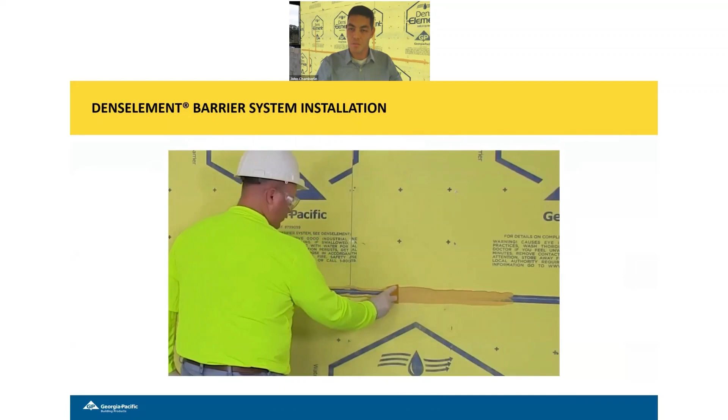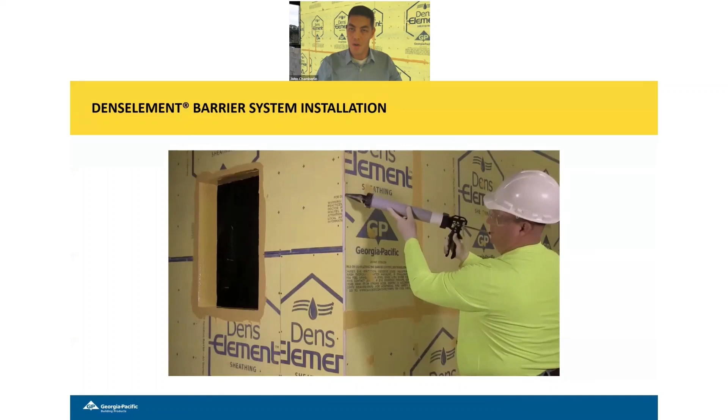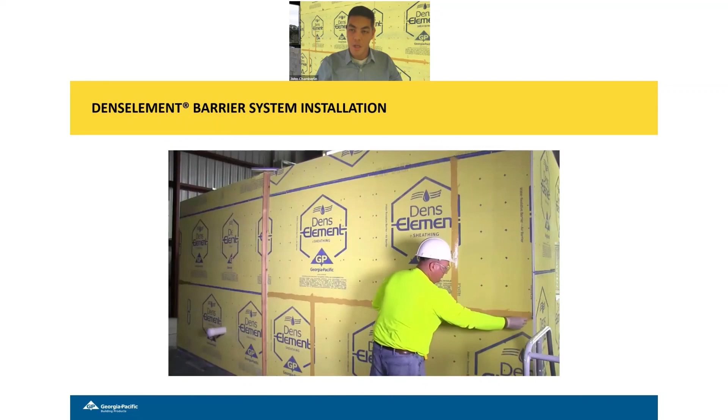Now, I mentioned already, the board itself is your water resistive barrier and your air barrier. So you create the continuity of your building envelope, of your water barrier and your air barrier, via this DensDefy liquid flashing. And we've really tried to prioritize ease of application. So you see it spreads very similarly to peanut butter, and really tried to focus on how do we make all of this continued benefits of schedule compression and reduction in quality control kind of inherent in the whole system.

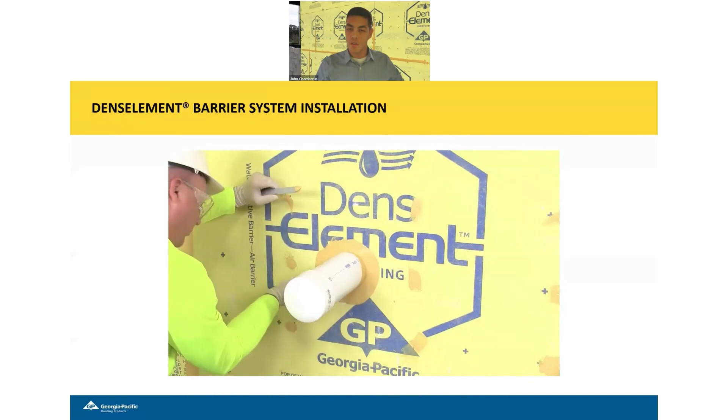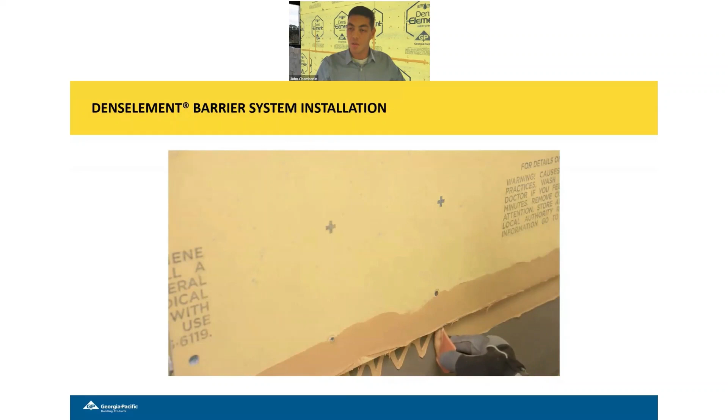So you see that DensDefy liquid flashing goes on as a liquid product. It can be spread very easily, and it conforms really nicely to some of these complex geometries. It is an STPE-based product, which means it can be installed in lower temperatures. It can be installed on damp surfaces. It cures and skins very, very quickly. And it becomes the second component and allows for completion of your water resistive barrier and air barrier system with Dens Element barrier system.

Now, as I mentioned, that has become a very popular trend in ways to construct. And obviously, you're seeing more and more projects using Dens Element throughout the country. In fact, we've got over 800 projects that have been completed, very close to 900 in construction right now. And this is ranging across all sorts of vertical segments. Commercial construction obviously can be healthcare or hospitality or education or government. And so we're seeing all of those really taking to the benefits of the Dens Element barrier system.

Now, the challenge with these systems is, how do you maintain that continuity? How do you know that you're going to have the same level of performance in these areas where your integral WRB sheathing stops? Or if you even have a strategy figured out for that, how do you feel confident in those connections? How do you tie them together? So continuity, first of all, it's critical. It has to exist. Otherwise, you're not going to have proper water resistance, proper air controls.

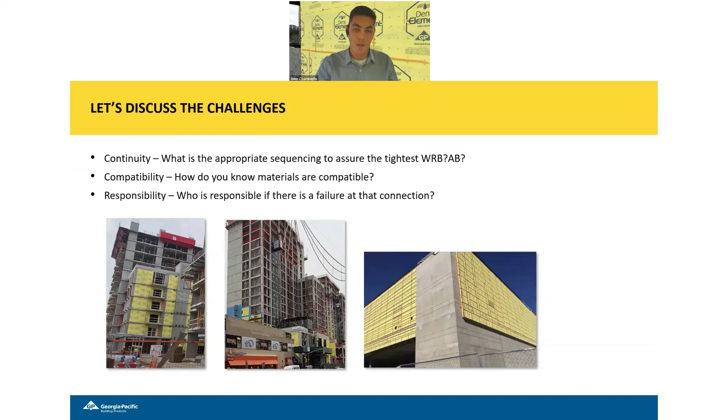And so we have this problem, this issue, right? And we want to maintain continuity. That's really the key to good performance. And then we have this challenge of maintaining continuity across different systems, potentially with different manufacturers. And what you see today is that in some cases, people go for it. They use a system that they're familiar with.

Perhaps the scope of work for cementitious substrates belongs to a waterproofer, and so they're going to use a system they're confident with. Maybe it's the drywall installer who has responsibility for installation of the DensElement barrier system. And so they kind of work in their own silos instead of coordinating with each other. And maybe that can work, but there's a lot of uncertainty. There's a responsibility for a decision that falls to someone in that project team.

And the bad day is when things don't work out, when there is not good compatibility. And sometimes we have obvious signs of that. Maybe we see bubbles or fish mouths, signs that there's not good adhesion. Maybe we see poor adhesion that actually will pull away prior to something else getting covered up. So if we're lucky, we can catch this early. But a really bad day is over time, as the building continues to move, there's a degradation driven by a lack of compatibility. And so that's what you want to avoid.

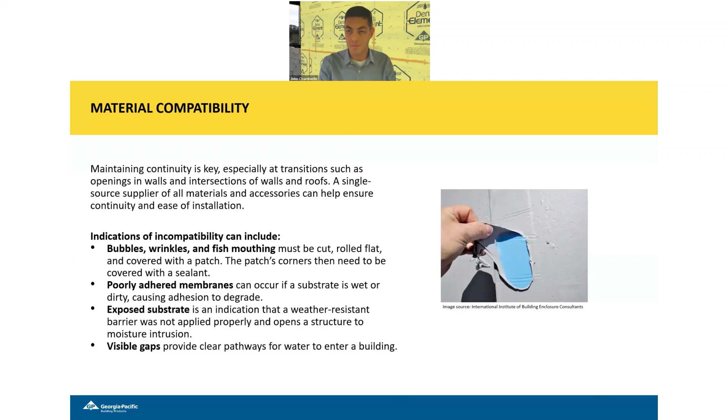That's what Georgia-Pacific has recognized as something that our customers need and want and are asking for our guidance on. And so I'm happy to announce that earlier this year, we launched a new system, the DensDefy liquid barrier system. We took a look at what is so popular about the DensElement barrier system, being the efficiency of installation, the ability to condense construction schedules, just the sheer ease of quality control. And we said, how can we carry that forward on substrates where you're not going to have a gypsum sheathing?

So DensDefy liquid barrier has all of those same attributes that you see in our liquid flashing. It's very easy to install. It can be installed in lower temperatures. It can be installed on damp substrates. It cures and skins very quickly. And most importantly, we know very well how it's going to interact with components of the DensElement barrier system, with the other DensDefy products. And so Georgia-Pacific is now able to offer a limited warranty for systems branching across not only DensElement, but also substrates that are protected with DensDefy liquid barrier.

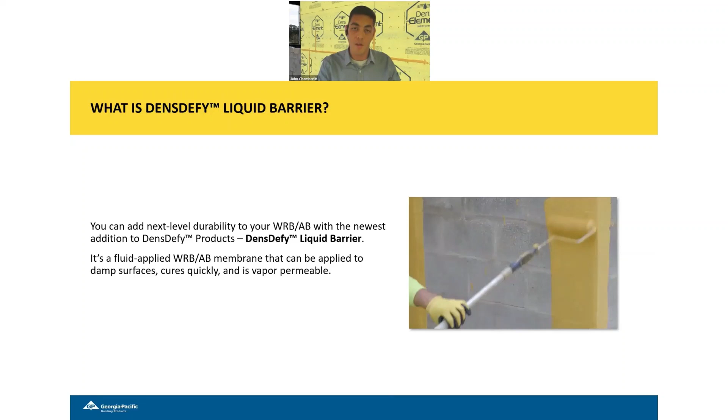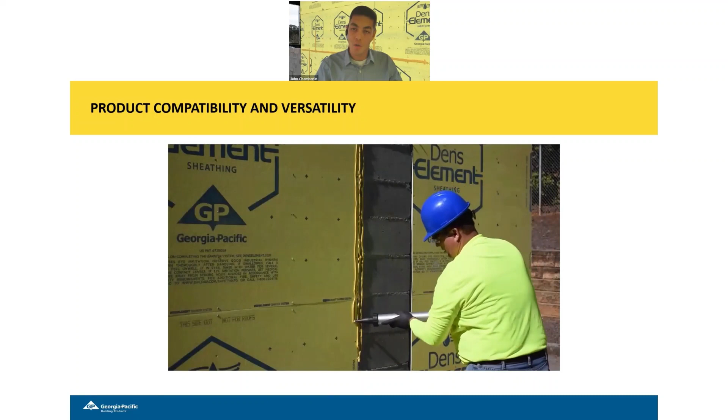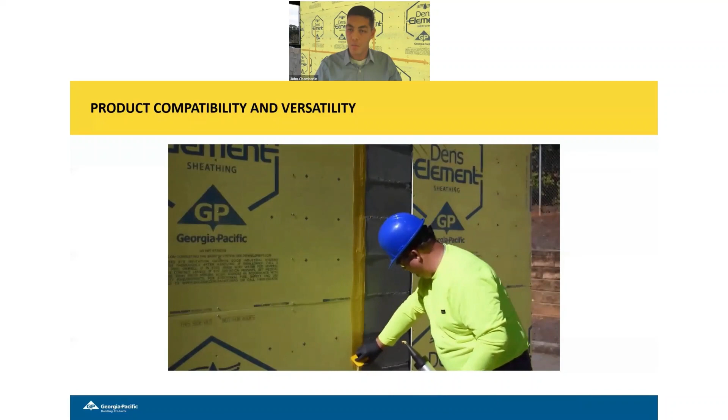And so again, here's the demo part of our demo cast. So in this example, you see that DensElement is running up into something load bearing, in this case CMU, and you see the same DensDefy liquid flashing that's used to complete a DensElement barrier system can now be used for these joints and these gaps between substrates. The product itself has high elongation, so it bridges very well. And once that has cured up, you've got good continuity of an air barrier from the DensElement over to the CMU.

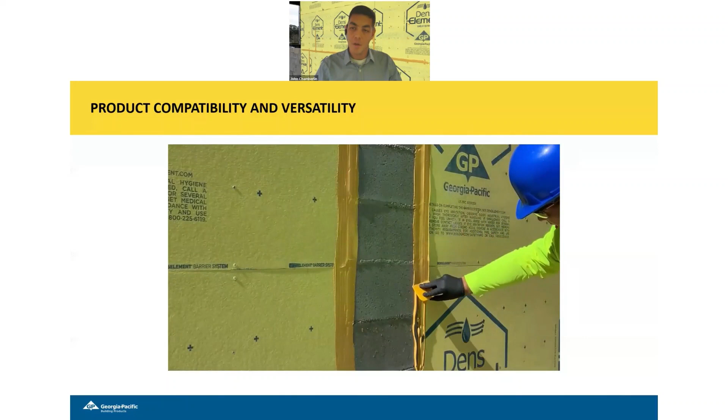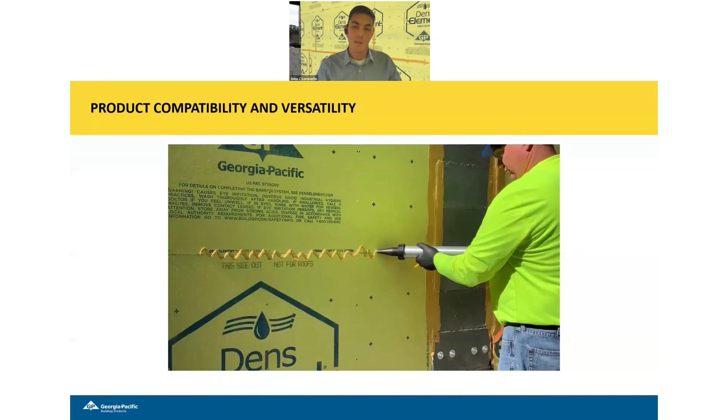You'll see that now, once you've done your visual inspection and made sure that you don't have any voids and pinholes, you can move on to address any areas of discontinuity for the DensElement barrier system itself. So again, spreading over our joints and seams, making sure that any fastener holes are covered up. Those are opportunities for water or air to get in, and we do require that those get covered. And just coming back and tying it all together so that your air barrier and your water resistive barrier are good and continuous. These products, simple to install, easy quality control, making sure that you have a proper mil thickness.

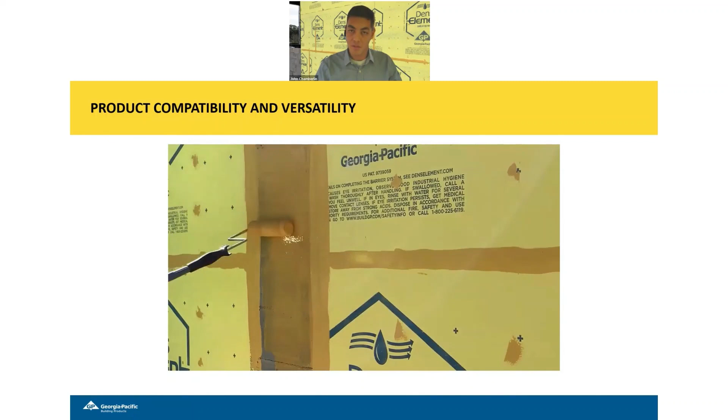For the liquid flashing, it's approximately 16 mils, so not a lot of material. For the DensDefy liquid barrier, which you now see being installed, we recommend a minimum of 14 to 18 wet mils, but you're going to find on porous substrates such as CMU that you really go for a void and pinhole free surface. You may not be able to hit exactly 14 to 18 mils, but because this product installs very simply, much like rolling paint, it's very easy to get that monolithic surface with only a couple of passes. And so there we have DensDefy liquid barrier.

I realize that was fast, and there will be time for some questions. But really, here's the value proposition in a nutshell. So we are going to continue construction. There is going to continue to be an expectation for high performance throughout the lifetime of the building. And at the same time, we're going to be challenged by compression of our construction schedules, by a lack of available labor. And again, there's always a look to opportunities for value engineering.

And so Georgia-Pacific has heard these challenges, and we're rising up to them, and we're doing that through innovation of products and services. So today we have our DensElement barrier system. We're now able to extend our protection against water intrusion, against unwanted air movement with our DensDefy liquid barrier system across all exterior walls. And you don't just get the products with that. So we are able to provide a warranty that works against water and air across all of these walls, as I mentioned, as well as providing those technical services that our customers need.